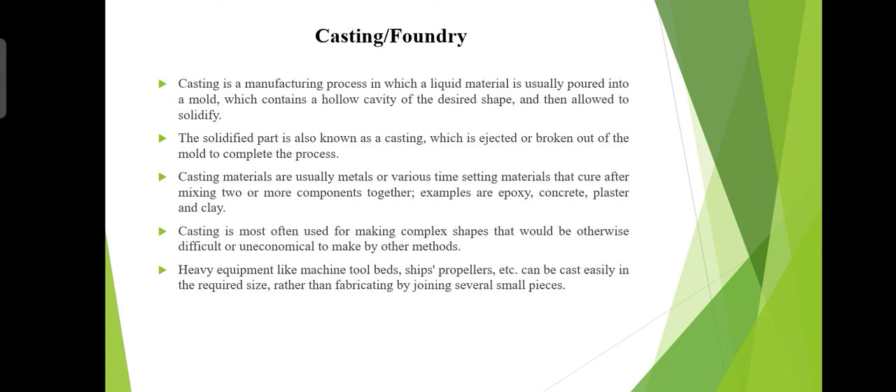We know many types of manufacturing processes, such as the forging process, powder metallurgy, and welding process. Casting is the most economical process compared to others. There are different casting techniques designed to overcome specific casting problems or to optimize the process for specific metals, product designs and scales, or other operational considerations such as automation.

Core making process is used to make internal features and gating systems. After that comes the mold, and this is the sand used for making the mold in sand casting process. After that, the raw material is melted in furnaces, poured into the mold, and solidified and cooled.

After this process, there are heat treatment processes done on the casted part, followed by cleaning and finishing operations. Inspection is the last process, in which you inspect all the defects present in the casting.

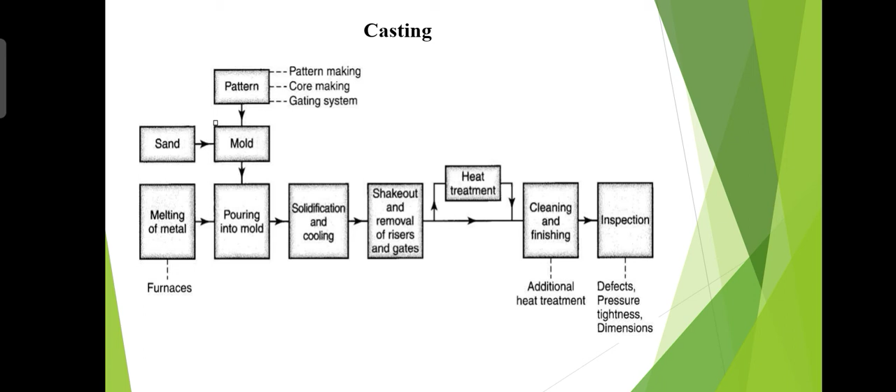Now here are some points about the casting process. First is the foundry. What is a foundry? A factory equipped for making molds, melting and handling molten metals, performing the casting process, and cleaning the finished castings.

Foundrymen are the workers who perform castings - that is the foundryman. Foundry is the place where you go to produce the casting processes and casting products. Ingot casting describes a large casting that is simple in shape, intended for subsequent reshaping by processes such as rolling or forging.

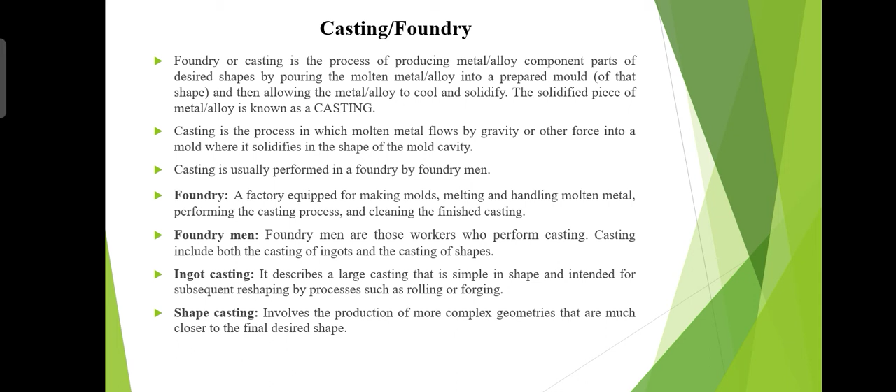Shape casting involves the production of more complex geometries that are much closer to the final desired product. The solidification process can be classified according to the engineering materials: metal, ceramic, specifically glasses, and polymers and polymer matrix composites.

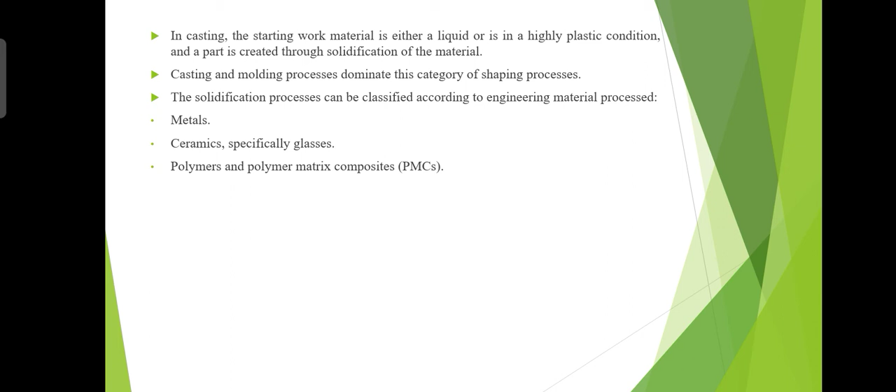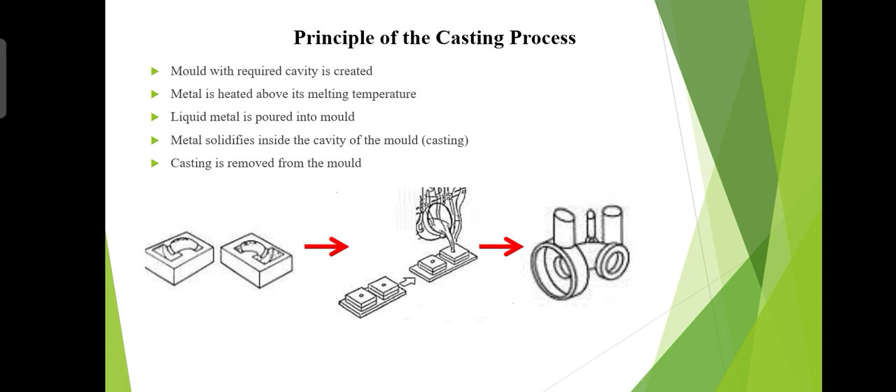In my next lecture I will tell you in depth what is a pattern, what are the pattern allowances, what is the mold, and what are the different types of materials used in the pattern process.